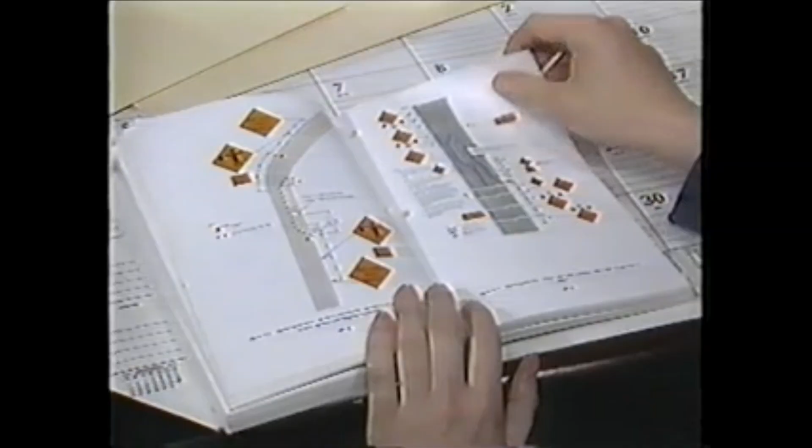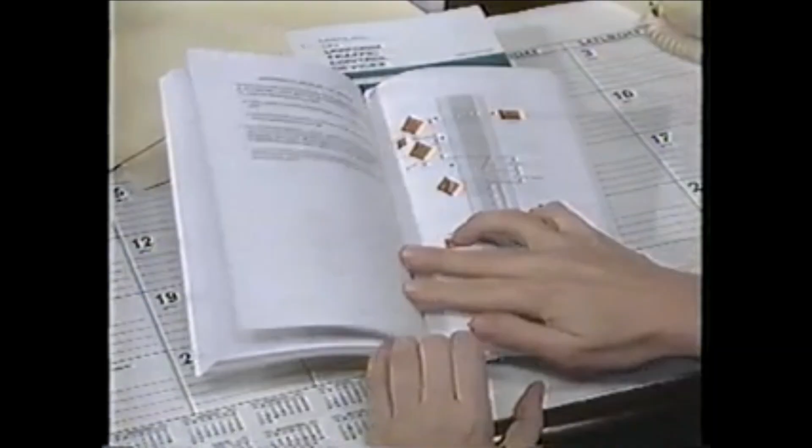Part 6 of the Manual on Uniform Traffic Control Devices covers traffic controls for street and highway construction, maintenance, utility, and incident management operations. It includes illustrations and layouts for several specific work zone applications. Your state or local agency may have also prepared a supplemental manual which shows additional specific applications and layouts.

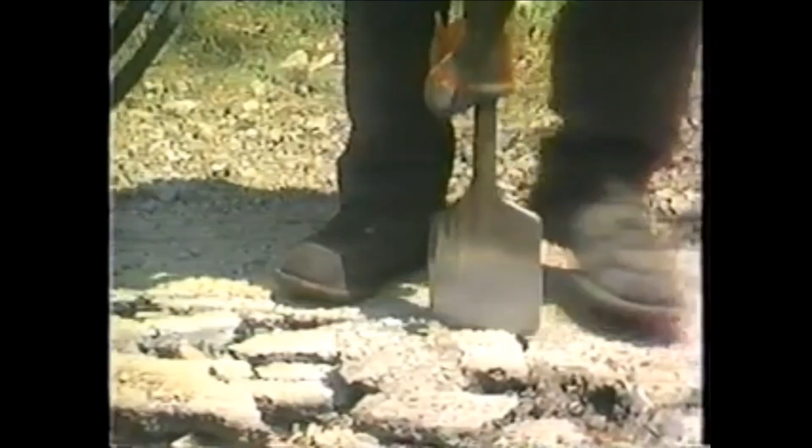Many of the typical work sites you'll encounter are illustrated in the Manual on Uniform Traffic Control Devices. However, the manual does not cover every conceivable situation. Good engineering judgment must be used to determine the best traffic control for a particular work site. This will depend upon the type of work needed, the location and duration of work, the type of roadway, traffic volume and speed, and any potential hazards.

The principles which you should follow to improve the safety of motorists and workers in short-term work areas include the following. First, keep safety of motorists, pedestrians, and workers your top priority. Try to keep traffic conditions as normal as possible, and take the time to plan and install a traffic control scheme. Sometimes this may mean spending almost as much time in setting up traffic control as you spend in completing the work.

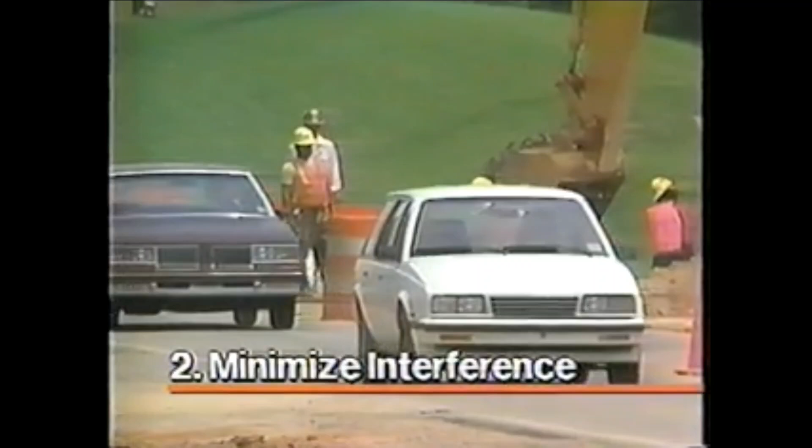Second, minimize interference with traffic movement. Try to maintain the safest maximum speed while eliminating abrupt lane closures. Also provide enough room for work equipment and vehicles inside of your work zone, and then open the roadway again as soon as possible.

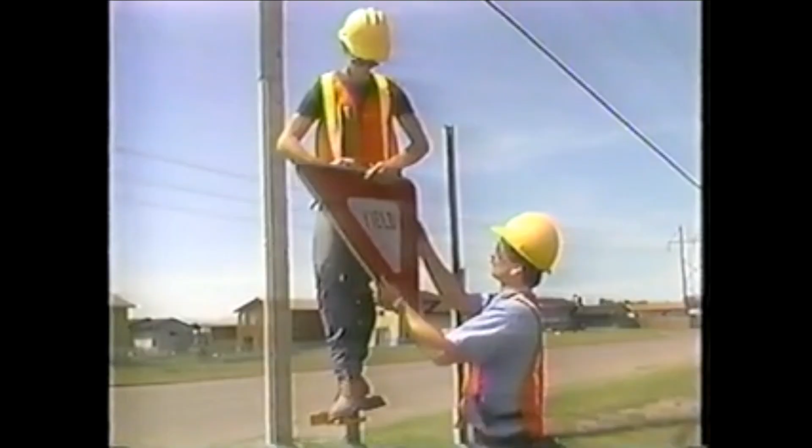Third, present a clear, easily understood message to drivers and pedestrians. Now, this means knowing the exact meaning of each traffic control device that is used. It also means that any conflict in meaning between temporary control devices and those permanently in place must be resolved. For example, you may need to close a lane for maintenance. All of the normal road conditions may guide the driver into the closed lane. Therefore, a special effort must be made to overrule the regular message during the duration of the work.

Fourth, have a plan in mind before going to the work site. The foreman generally takes on responsibility for designing, installing, and maintaining the traffic control plan. Now, this includes keeping the control devices in good repair and properly stored so that adequate visibility is maintained. As soon as the project is finished, you should promptly remove the traffic control devices.

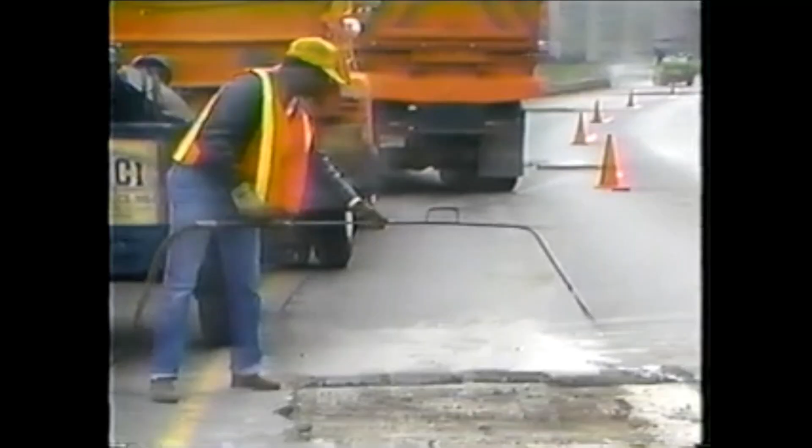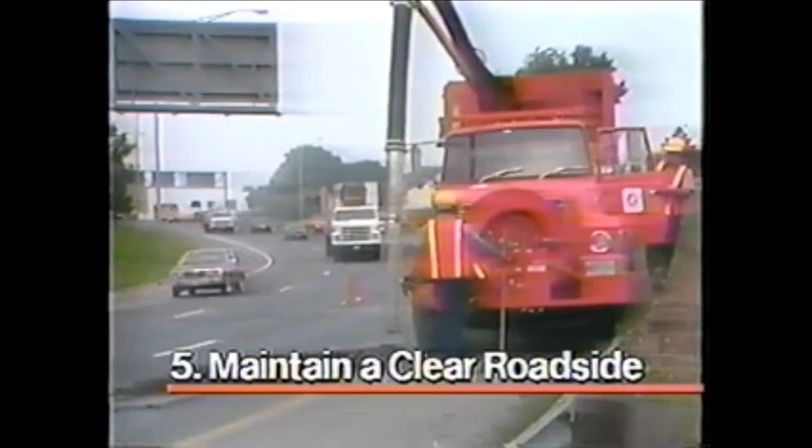Fifth and finally, anticipate the increased hazards caused by your presence on or near the roadway. Be sure to keep your equipment, materials, debris, and yourself out of the path of traffic. This means try to keep a clear roadside through the work area. Use traffic control devices that are lightweight and yielding to lessen vehicle damage.

The traffic control devices selected to assist motorists must satisfy a driver's need for information. You should carefully consider both the message and the placement of the traffic control devices. Inappropriate messages and incorrect placement of signs, markings, and other devices can mislead and confuse the motorist.

In work zones, there are 3 categories of messages which must be conveyed to the driver. These include the warning of potential hazards, information on safe speed, and the lane or shoulder over which a vehicle should be traveling. Drivers have particular problems when traffic control devices give inaccurate information, do not conform to standards, or are improperly installed.

Each person whose actions affect maintenance and construction zone safety should receive training. They must know the following principles. Keep the motorist's respect and the agency's credibility by presenting clean and well-maintained traffic control devices. If work is not in progress or a hazard is not there, take down, fold over, or cover the signs.

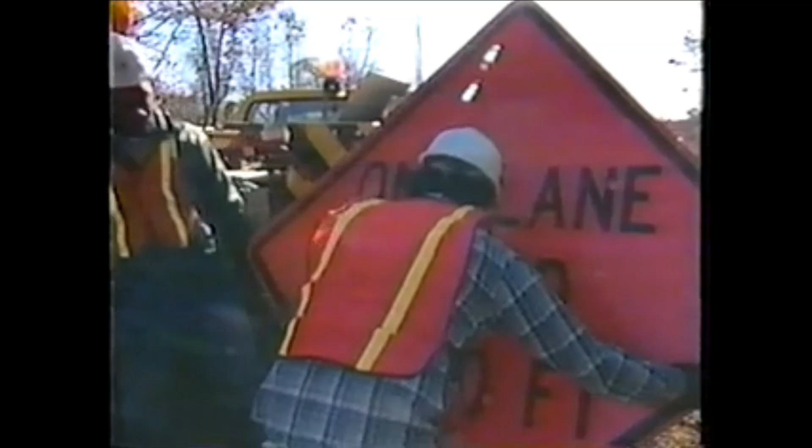Don't mislead the public. Remove channelizing devices when no longer needed. Don't tell drivers to expect a hazard that's not there. If you do, they may not believe other signs and devices used on the project. For example, don't use this sign unless flagging is actually taking place. Put yourself in the driver's seat and see how the traffic control looks to you. Maintain the controls as if every driver were approaching the area for the first time, especially in short-term work sites.

Discuss and think about good work area traffic control. Help your co-workers to perform their work with a minimum of exposure to traffic while watching for problems and reporting any damaged or missing devices.

Now, let's review what we've discussed in this introduction to work zone safety. Here are the main points to remember. 1. Part 6 of the Manual on Uniform Traffic Control Devices is the standard for traffic control in your work zones.

2. It may be supplemented by state and local manuals, and these should be consulted before setting up a work zone. 3. Plan your traffic control before going to the work site. Good planning includes carrying the proper signs, cones, and other devices needed to safely do the job. Be sure they're clean and in good repair.

4. Only display those devices that are needed by the driver. If the work zone traffic control device is not needed, remove, cover, or lay it down as soon as possible. Don't mislead the public. 5. Always ask yourself, how does it look to the unsuspecting driver approaching my work site? What's the driver's view?

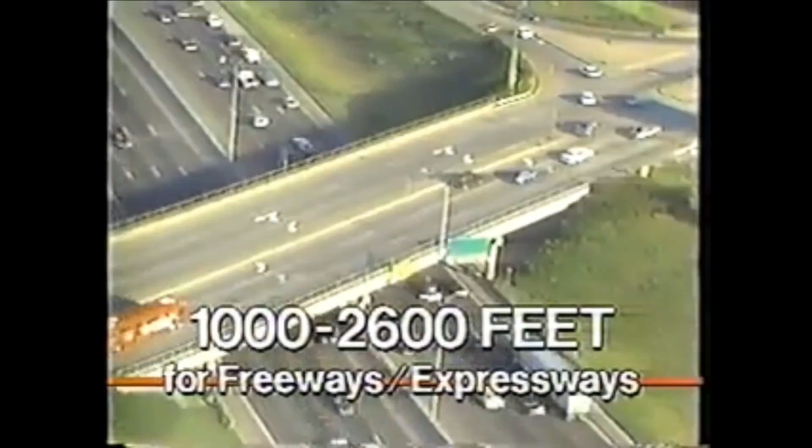In keeping with the Manual on Uniform Traffic Control Devices, a rule of thumb for the spacing between signs in a series is 200 feet for low-speed city streets, 350 feet for high-speed urban roads, 500 feet for rural roads, and 1,000 to 2,600 feet for freeways and expressways. Lightweight, yielding, or breakaway supports should be used for all sign installations.

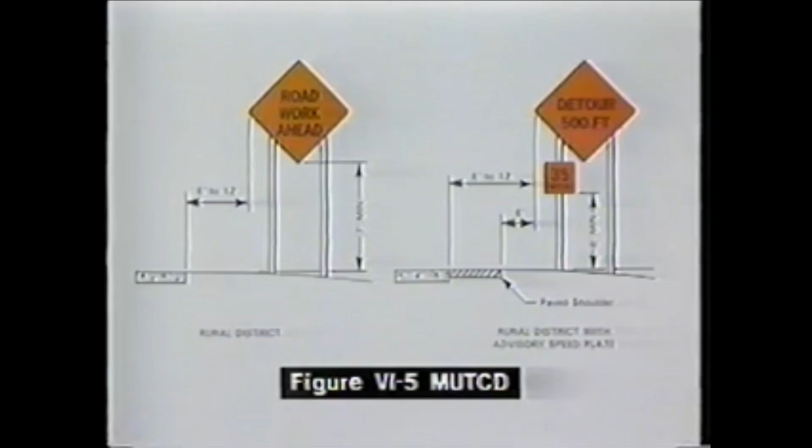Sign installations should be reviewed to avoid any possible glare from vehicle headlights. The minimum height requirements for signs attached to posts is shown. Signs on portable supports are required to be at least 1 foot above the roadway. All signs used at night are required by the Manual on Uniform Traffic Control Devices to be retroreflective or externally illuminated. Lighting from existing streetlights does not meet this requirement.

Pavement markings are very important in guiding traffic through work zones. Pavement markings, delineators, and channelizing devices outline the traffic path around a work area. Drivers use pavement markings as a primary means of guidance. The standard markings planned for the road should be in place before opening a new facility to traffic.

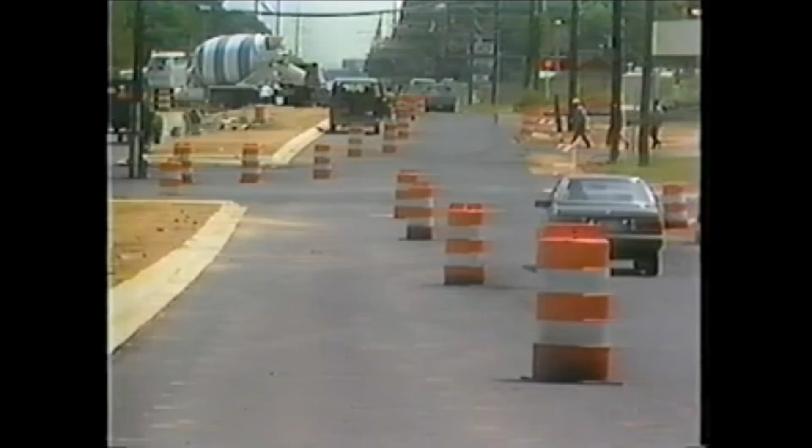Also, if revised lane patterns are planned for the work zone, interim markings should be placed before the traffic is changed. Where this is not feasible, such as during the process of making a traffic shift or carrying traffic through surfacing operations, temporary delineation may be accomplished with lines of traffic cones, other channelizing devices, or short strips of adhesive-backed retroreflectorized tape.

When pavement placed during the day is to be open to traffic at night, and permanent striping cannot be placed before the end of the workday, an interim stripe should be applied to indicate to the driver the location of the lane or center line.

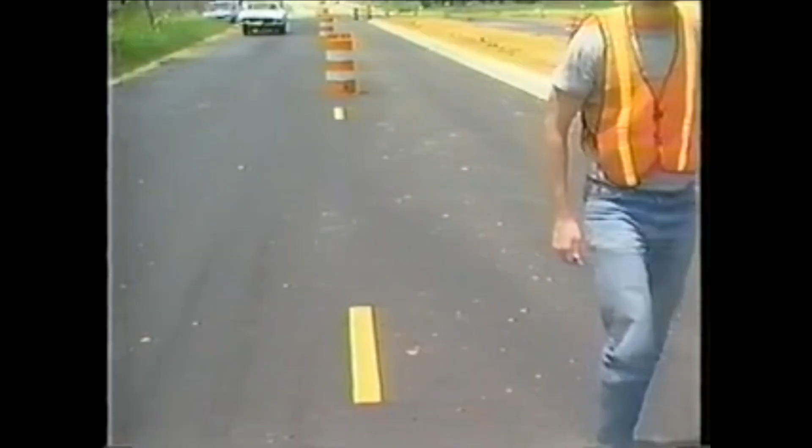Channelizing devices are used to warn and direct traffic away from or around a work area. They also control the flow of traffic when separating two directions of travel. They include barricades, barriers, vertical panels, cones, tubular markers, and drums. Each type has distinct visibility characteristics and advantages.

The Manual on Uniform Traffic Control Devices requires that channelizing devices used at night be retroreflectorized with a material having a smooth, sealed outer surface. This includes commercially available retroreflectorized sheeting and tape strips. It does not include the use of pavement marking tape.

Some devices are easily knocked down and require a weight, such as a sandbag. These weights must be placed at the bottom of the device for stability and to keep the weight from being thrown if hit. Neither the device nor the weight should cause excessive damage when struck. Sandbags should not be placed where they will be a hazard to the driver or limit the view of the device.

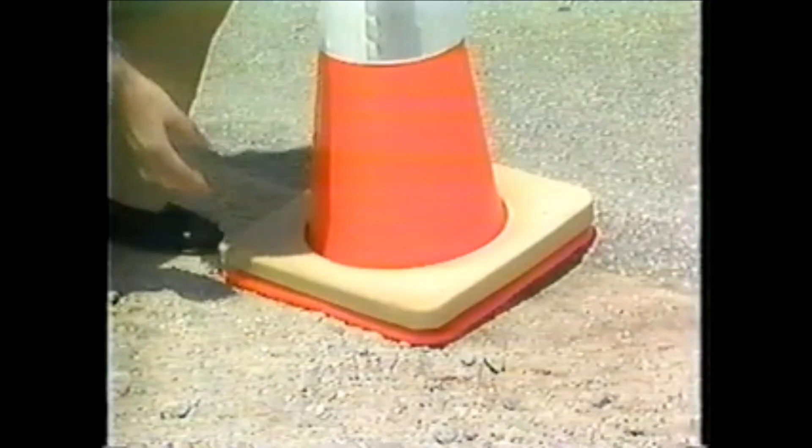Cones are lightweight channelizing devices that may be stacked for storage. They are easy to place and remove and are a minor impedance to traffic flow. For stability, a rubber or sand collar or a specially weighted base may be added. When purchasing cones, specifications may require 60% or more of the weight in the base, thus removing the need for extra base weights or collars. Cones cause little or no damage when hit.

They must be at least 18 inches high, but 28-inch cones must be used on freeways and other roadways where speeds are 45 miles an hour or greater. At night, 28-inch cones or larger must be used. 28-inch cones must have a 4-inch wide band, 2 inches below a 6-inch band. Any cone height less than 28 inches is not acceptable for nighttime use.

Using cones can have disadvantages because drivers have less respect for them, and cones can be easily displaced or knocked over unless properly ballasted. When cones are used, they should be checked periodically, and those that have either been displaced or knocked over should be reset.

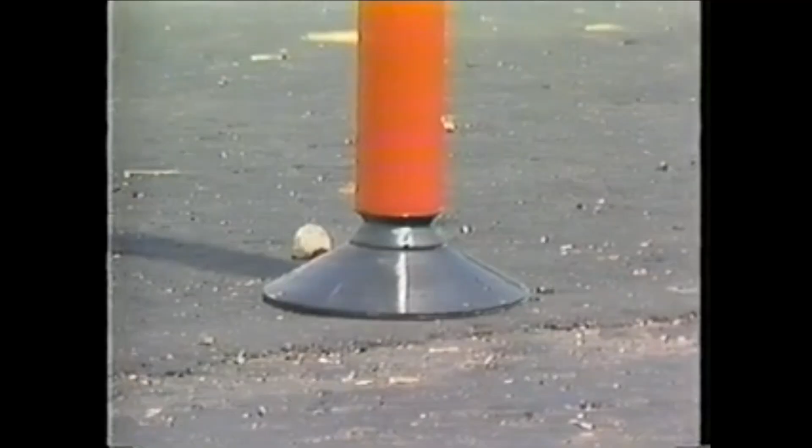Tubular markers are similar to cones in that they are lightweight, easy to install, and are a minor impedance to traffic flow. Tubular markers may be set in special weighted bases or fastened directly to the pavement. Because of their narrow size, they offer a particular advantage when forming new lanes or separating two-way traffic for a short-term activity.

Tubular markers are at least 18 inches high, with taller devices preferred for better visibility. If used at night, the Manual on Uniform Traffic Control Devices requires that they be retroreflectorized. Tubular markers have the same disadvantages as cones, plus having less visible area.

Vertical panels are used as either channelizing or warning devices, but are not as portable or easy to install as cones or tubular markers. They are useful in narrow areas where barricades and drums would be too wide. Vertical panels should be mounted on lightweight posts, driven into the ground, or placed on lightweight portable supports. They may be mounted back to back and used between opposing lanes of traffic.

Drums are used as either channelizing or warning devices. They are highly visible, give the appearance of being formidable objects, and therefore command the respect of drivers. Plastic, not metal drums, shall be used. The Manual on Uniform Traffic Control Devices requires that markings on a drum be horizontal orange and white stripes that are retroreflectorized 4 to 6 inches wide.

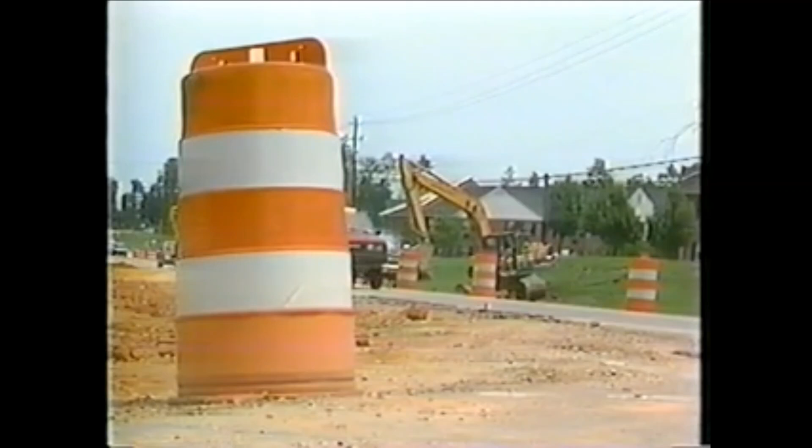The drum must have at least 2 sets of orange and white stripes, but can have non-retroreflectorized spaces up to 2 inches wide between the stripes. Drums must have a minimum width of 18 inches, regardless of orientation, and their tops shall be closed. Plastic drums can be nested, allowing for easy transport and storage. Many of the commercially available plastic drums have 1 or more flat sides to prevent rolling and have flanges or recesses for warning lights.

Barricades should be constructed of lightweight materials and are classified as types 1, 2, and 3. The type is determined by the number of retroreflectorized rails facing traffic. Types 1 and 2 are portable and can be used for either channelizing or marking hazards. Type 3 barricades are used for road closures. Types 1 and 2 often have rails on both sides and may be used to separate opposing lanes of traffic. The rails have alternating orange and white retroreflectorized stripes that slope down toward the side traffic is to pass.

For road closures, a Road Closed sign and a detour arrow sign, if needed, may be mounted on a Type 3 barricade. If local traffic will be allowed to use the closed roadway, then the Local Traffic Only sign should be mounted on the barricade. The terms barrier and barricade are frequently confused. A barricade indicates the location of a hazard or a desired path a motorist should take. On the other hand, a barrier provides a positive physical separation between traffic and the work area or between opposing streams of traffic.

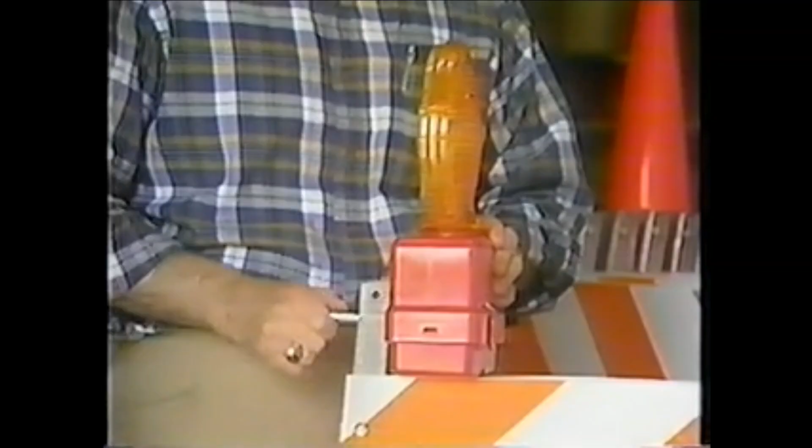Steady burn lights, Type C, are used on a series of channelizing devices or on barriers which either form the taper to close a lane or shoulder or to keep a section of lane or shoulder closed, and are also used on the channelizing devices beside the work area at night. Both Type A and Type C lights have photoelectric switches to activate them at night. Warning lights should be secured in such a way that they'll not separate from the channelizing device or sign when hit by a vehicle. Warning lights that come loose during an accident may become dangerous flying objects.

Work vehicles in or near the traffic areas are hazards and should be equipped with flashing lights. The vehicle warning may be emergency flashers, flashing, strobe, or rotating beacons. High-intensity lights are effective both day and night. The flashing lights should meet the requirements of the agency that has jurisdiction over the street or highway. These lights should be used in addition to other channelizing and warning devices. However, in some emergency situations where the work may be in progress for a very short time, these lights may be the only warning device.

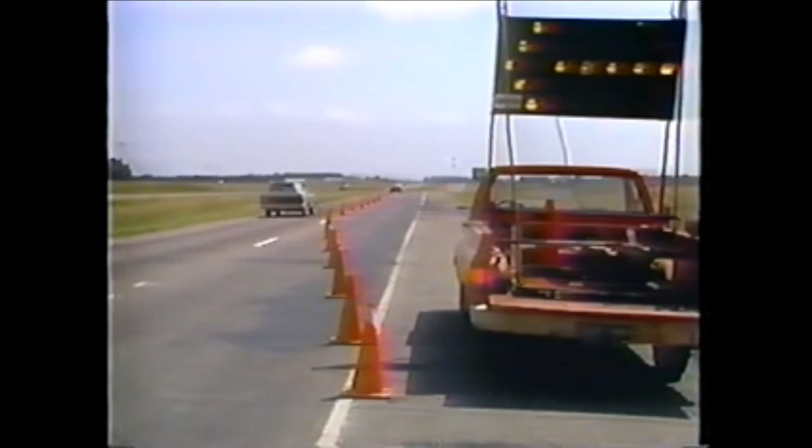Arrow displays are signs with a matrix of lights capable of either flashing or sequential displays. They are used for moving traffic out of a lane and may be used at tapered lane closures and with mobile operations. They are not a substitute for a lane closure taper. There are two types of arrow displays: flashing and sequencing.

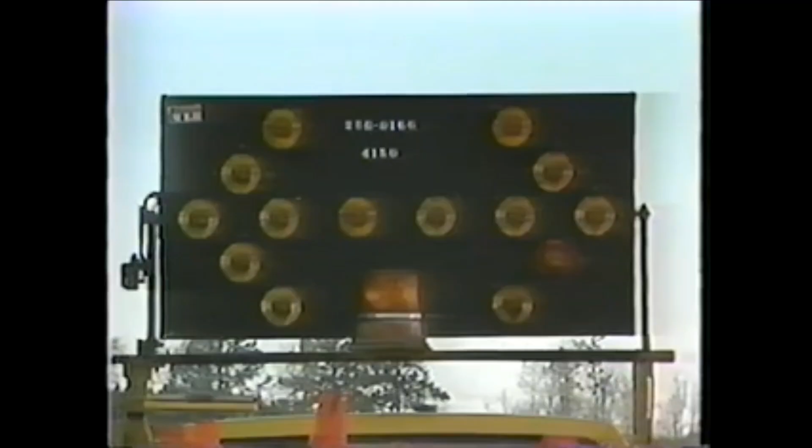Arrow displays have four basic operating modes: left arrow, right arrow, left and right arrow, and caution mode, four lamps arranged in the four corners of the panel. Flashing arrows must never be used on two-lane roadways because traffic may be directed into a head-on collision. Arrow displays on two-lane roads can only be used in the caution mode.

Flashing hazard identification beacons are used in work areas both day and night to alert drivers of a critical point in the highway, such as a truck crossing, and have the same meaning as permanently mounted beacons. Flashing beacons are not used for channelizations.

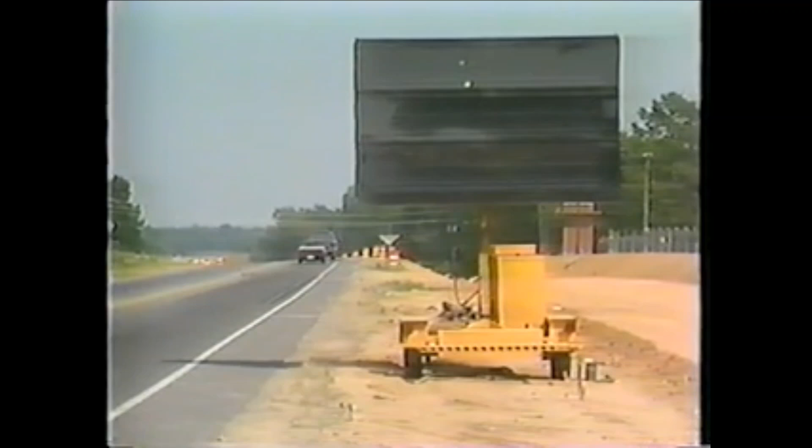Portable changeable message signs capable of displaying various messages to the motorist will sometimes help construction zone signing. These devices are normally trailer or truck mounted and have their own power system. Because they're expensive to buy and operate, changeable message signs are normally used for the more complex traffic control plans.

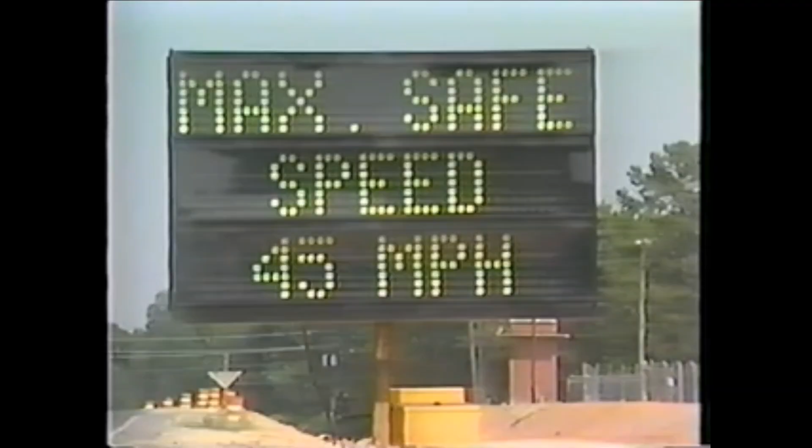When using a changeable message sign, be sure the message is clear. A lengthy message may distract the motorist too long. The word order in a message can also cause problems. For example, "right lane closed, merge" would get a different driver response than "lane closed, merge right." Yet the messages are similar, except for the beginning point.

This concludes our brief review of traffic control devices. Particular details will be found in the Manual on Uniform Traffic Control Devices. Now, in the following section, we'll be discussing the concepts and elements of traffic control zones.

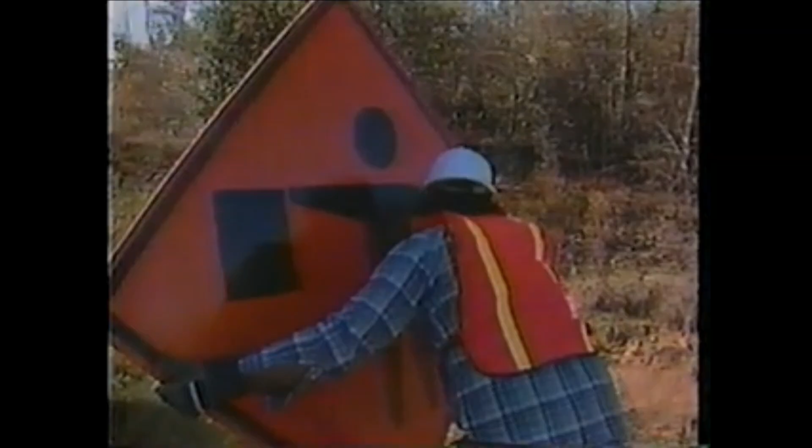When traffic is affected by construction, maintenance, or utility operations, traffic control is needed to safely guide and protect motorists, pedestrians, and workers in and through work zones. This zone is the area between the first advance warning sign and the point beyond the work where traffic is no longer affected. Most temporary traffic control zones can be divided into four areas.

In this part of the training, we'll look at each of the areas and examine them for one direction of travel. If the work you'll be doing affects more than one direction of travel, the same principles we cover here will apply to traffic in all directions. These are the four areas of temporary traffic control zones we'll be discussing. Accidents can occur in all of these areas if they are not properly controlled.

Advance warning area, transition area, activity area, and termination area. The advance warning area prepares drivers and alerts them to what's coming. An advance warning area is necessary for all traffic control zones because drivers need to know what to expect. Before reaching the work area, drivers should have enough time to adjust their driving patterns.

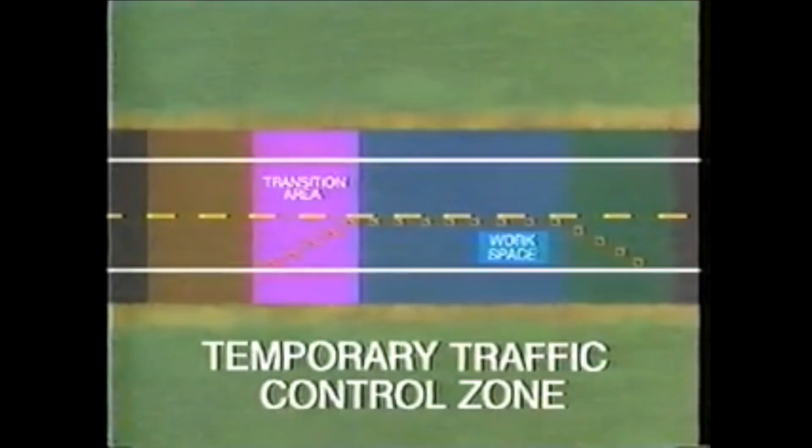Next is the transition area. When work is performed within 1 or more traveled lanes, a lane closure is generally required. In the transition area, traffic is channeled from the normal highway lanes to a new path, which is required to move traffic around the activity area. Most often, this is accomplished with tapers to close the lanes. The transition area should be obvious to drivers. The correct path should be clearly marked with channelizing devices so that drivers will not make a mistake and follow the old path. If the existing pavement markings create confusion, interim markings should be used.

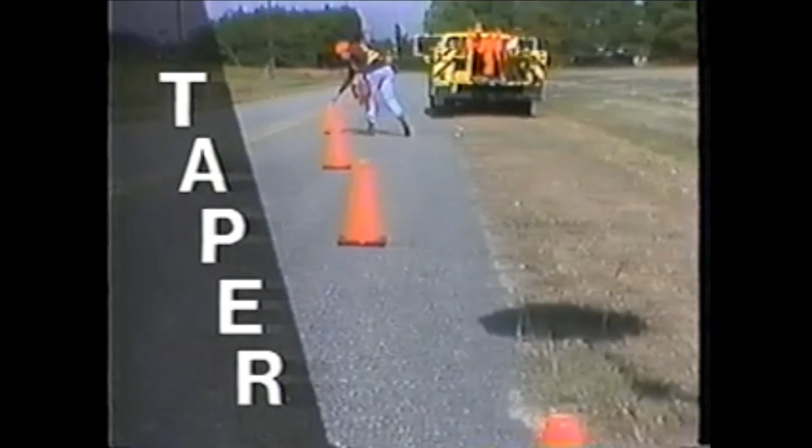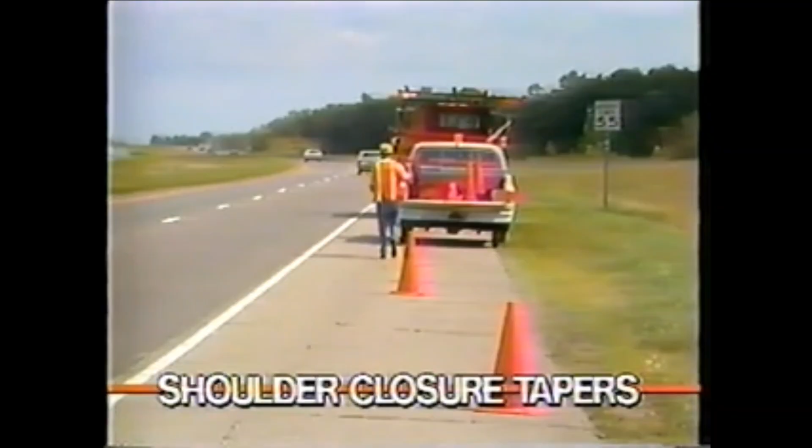A taper is a series of channelizing devices placed at an angle to move traffic out of its normal path. There are 5 general types of tapers used in traffic control zones. Merging tapers close a lane of moving traffic on multi-lane highways where a merge is required. The spacing for channelizing devices should not be greater than the speed limit. Lane shift tapers move traffic to a different lane where a merge is not required. Shoulder closure tapers are needed to close shoulder areas.

Two-way tapers control two-way traffic where drivers are required to alternately use a single lane. These tapers are used when flaggers are present. Downstream tapers are those installed to allow traffic back into the normal path. The length of each type of taper is very important and is determined by several factors. Let's look at each of these factors in more detail.

The length of a merging taper, which is used to close a lane, is determined by the speed of traffic and the width of the lane to be closed. The 2 formulas for determining the length of tapers for lane closures are discussed in the Manual on Uniform Traffic Control Devices. For speeds of 45 miles per hour or greater, the merging taper length should be at least the width of the lane multiplied by the posted speed or the observed operating speed.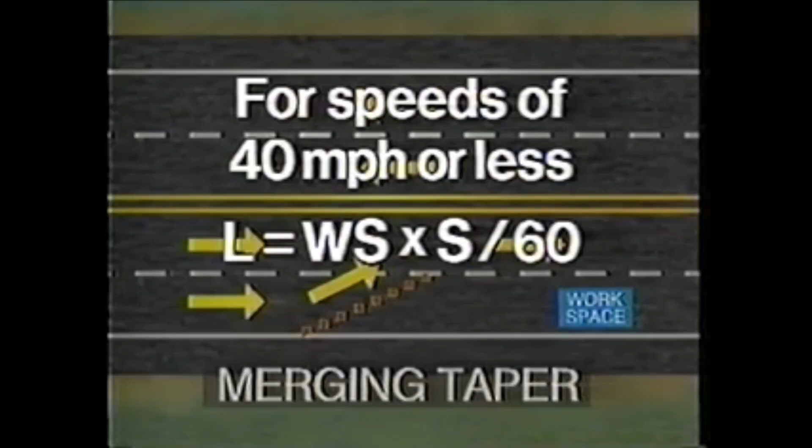For speeds of 40 miles per hour or less, the length of the taper should be at least the product of the width of the lane times the posted speed squared divided by 60. This is actually the high-speed taper multiplied by the factor of the posted speed divided by 60. In most tables, the equation is shown like this.

Most state and local manuals include tables showing the required taper lengths for various speeds and lane widths. For example, a 40 mile per hour posted speed and an 11-foot lane requires a 295-foot merging taper.

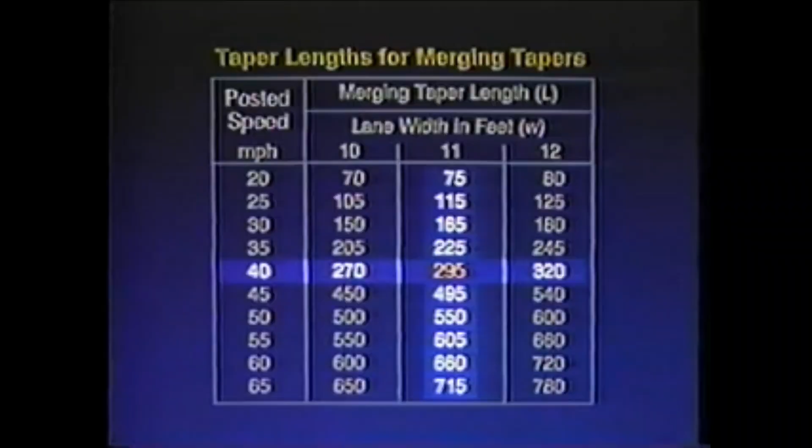The lane shift taper is used when traffic is only being shifted and no merge is required. Therefore, the taper does not have to be as long as a merging taper. The minimum taper length is 1/2 L, where L is the computed length of a merging taper for the given posted speed and width of the lane shift.

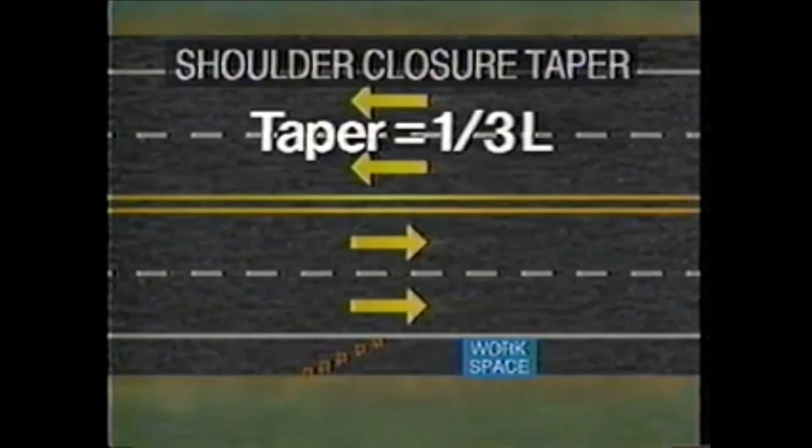When an improved shoulder having a width of 8 feet or more is closed on a high-speed roadway, it should be treated as a closed part of the roadway. This is because drivers expect to be able to use the shoulder in the event of an emergency. The shoulder taper should be 1/3 L, where L is the shoulder width multiplied by the posted speed. If the shoulder is used as a travel lane, however, the taper is equal to L.

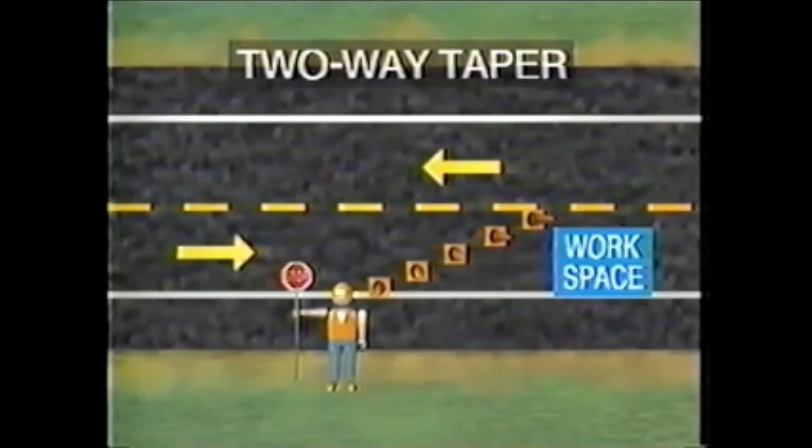The two-way traffic taper is used in advance of a work area that occupies part of a two-way road when the remainder of the road is used alternately by traffic in either direction. A short taper is used to slow down traffic by giving the appearance of restricted alignment. One or more flaggers or temporary traffic signals are used to assign the right-of-way in such conditions. Two-way traffic tapers should be a maximum of 100 feet long, with channelizing devices spaced at a maximum of 20 feet to provide clear delineation of the taper.

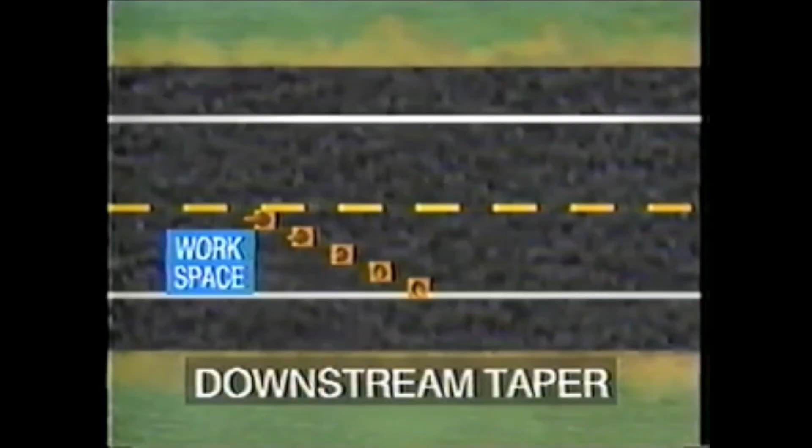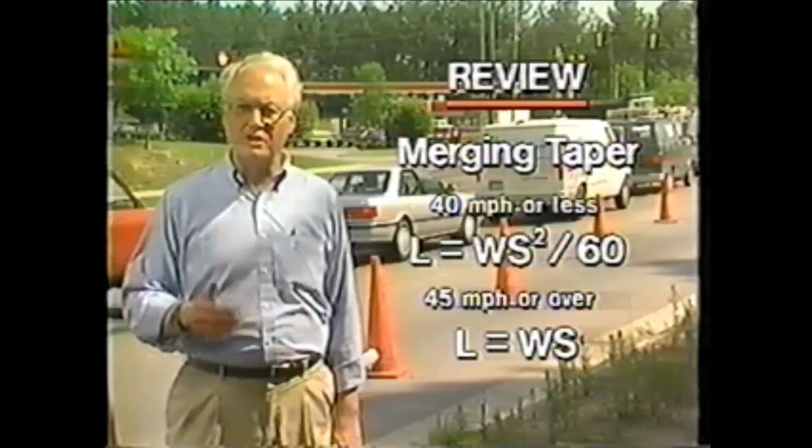Let's briefly review tapers and taper lengths. Where traffic on a multi-lane highway must merge, the required length is a function of the speed limit and the lane width. If traffic on a multi-lane road is to be shifted to a different lane, the taper is 1/2 the length of the merging taper. When working on an improved shoulder, the required taper length is 1/3 of the merging taper length.

Now, when traffic is on a two-way road and it's reduced to one lane, a taper with a maximum length of 100 feet is needed. And to let the driver know that he may return to the closed portion of the roadway, a 100-foot taper may be used. If restricted sight distance is a problem, for example, a sharp vertical or horizontal curve, the taper should be moved well in advance of the obstructed view. Beginnings of tapers should never be hidden behind curves.

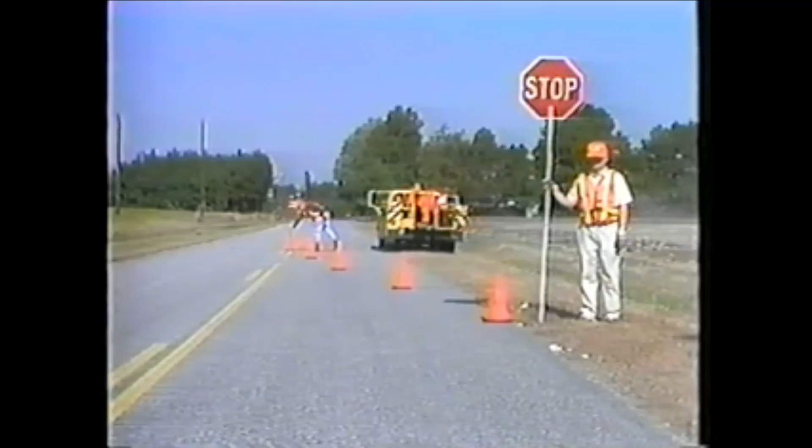Traffic should be observed to see if the taper is working correctly. Frequent use of brakes and evidence of skid markings are indications that either the taper is too short or the advance warning is inadequate. The activity area consists of 4 distinct spaces. They are the longitudinal and lateral buffer spaces, the workspace, and the traffic space.

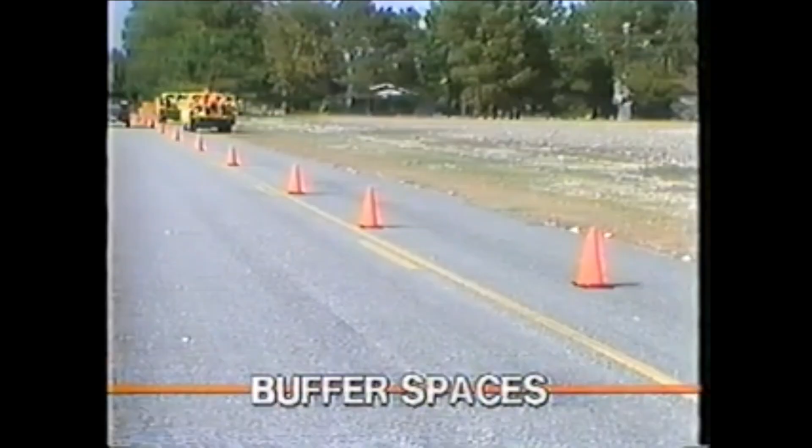Buffer spaces are open and unoccupied spaces and provide a margin of safety for traffic and workers. Although they are optional, they should be provided whenever field conditions permit their use. The longitudinal buffer space is between the transition area and the workspace and provides room for the driver to stop his vehicle if he fails to negotiate the transition taper and before he enters the actual workspace. It is important for the buffer space to be free of equipment, workers, materials, and vehicles.

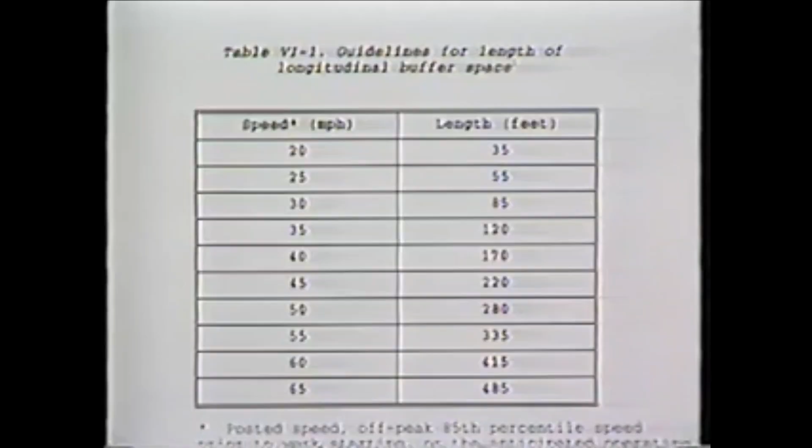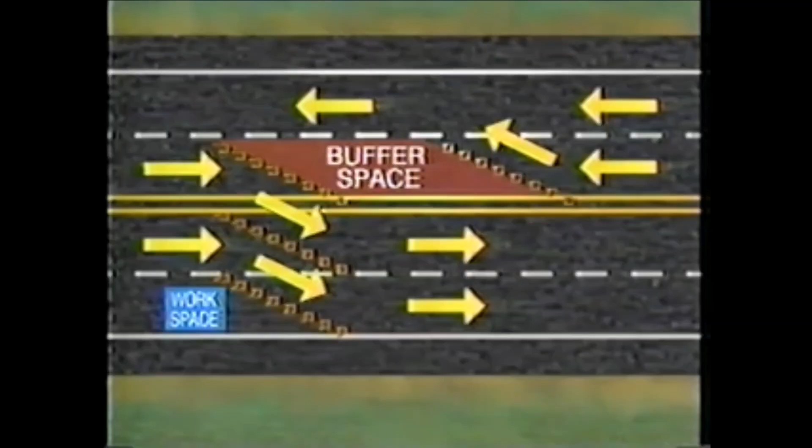The length of the longitudinal buffer space is based on the stopping distance for the speed being considered. Table 6-1 of the Manual on Uniform Traffic Control Devices provides guidelines for the length of buffer spaces for various speeds. It is measured from the end of the transition area to the beginning of the workspace. Situations occur where one lane of traffic uses a lane that normally flows in the opposite direction. In these situations, a longitudinal buffer space should be used to separate the 2 tapers for the opposing directions of traffic to help prevent head-on collisions.

Lateral buffer spaces separate moving traffic from the workspace as well as opposing streams of traffic. The width of this space is determined by engineering judgment and is often governed by the portion of the roadway which is needed to perform the actual work.

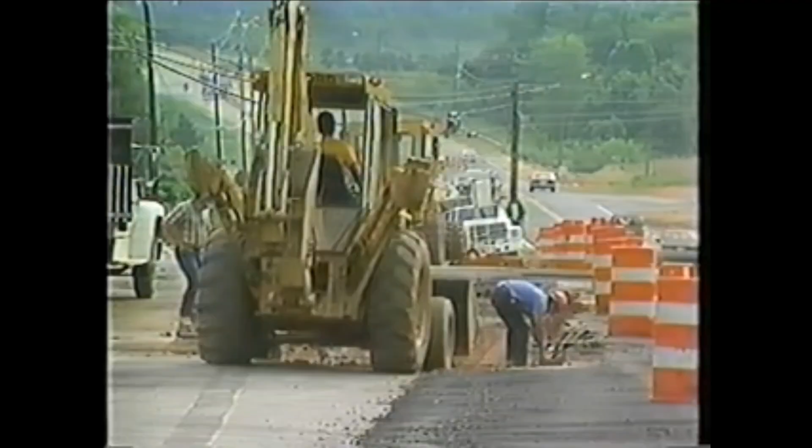The workspace is that portion of the roadway which contains the work activity. It is closed to traffic and set aside for exclusive use by workers, equipment, and the storage of construction materials. Workspaces may remain in fixed locations or may move as work progresses. For long-term operations, the workspace may be shielded by barriers to exclude traffic and pedestrians.

The traffic space is the portion of the roadway in which traffic is routed through the activity area. Channelizing devices are used to separate the traffic space from the work activity at a spacing no greater than twice the posted speed limit. Every feasible effort should be made to minimize traffic conflicts with the work area.

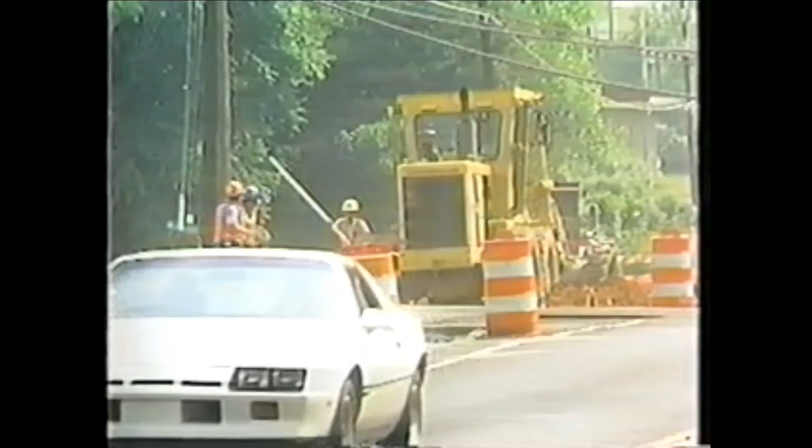These are suggestions. Use traffic control devices to make the travel path clearly visible to drivers. For nighttime operations, the traffic control devices must be retroreflectorized and have a large surface area. Place channelizing devices between the work area and the traveled way. Provide safe entrances and exits for work vehicles.

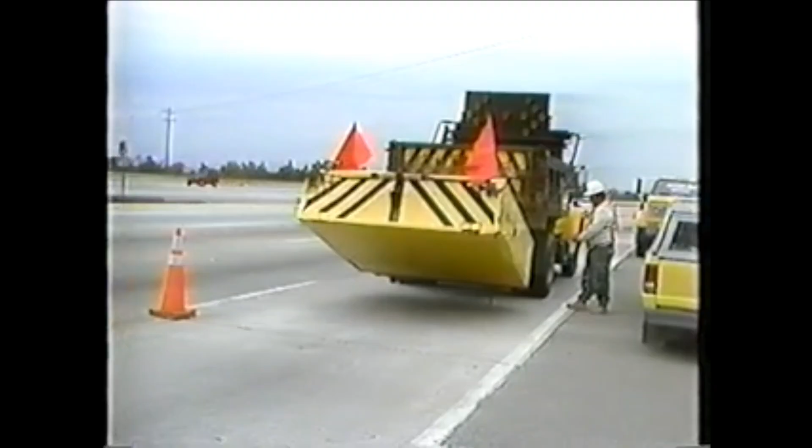Flags and flashing lights should be considered on work vehicles exposed to traffic, and a truck-mounted attenuator be provided whenever possible to protect work crews. The termination area provides a short distance for traffic to clear the activity area and return to the normal traffic lanes. It extends from the downstream end of the activity area to the End Road Work sign. A downstream taper may be placed in the termination area.

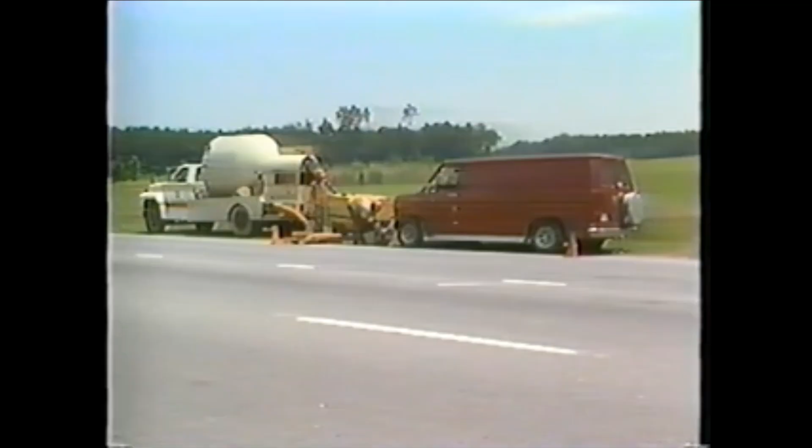For some work operations, such as a single location utility or maintenance repair, it may not be necessary to display an End Road Work sign because it will be obvious to drivers that they have passed the activity area. Avoid gaps in the traffic control at work zones that may falsely indicate to drivers that they have passed the activity area. For example, if the work includes intermittent activity throughout a 1-mile section, drivers should be reminded periodically that they are still in the work zone.

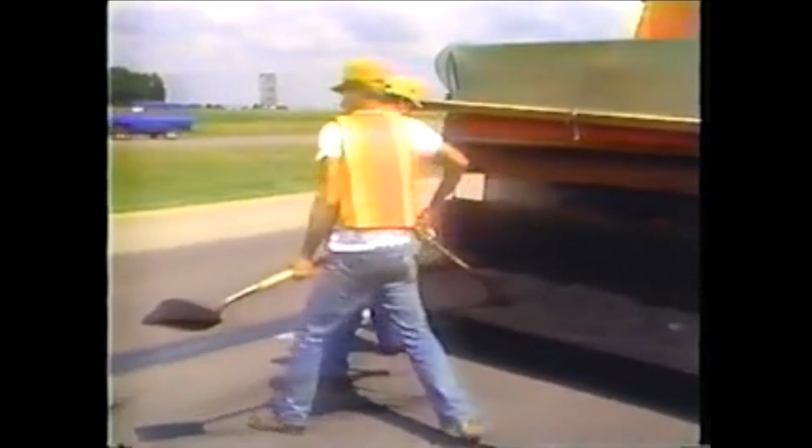The primary purpose of the guide sign, Road Work, next miles, is to inform the driver of the length of the work zone. It should not be erected until work begins. In mobile operations, the advance warning area may be provided by signs and flashing lights on the work vehicle. Additional advance warning signs may be warranted depending on the volume and speed of the traffic. A shadow vehicle equipped with an arrow display and flashing lights may also be used.

With mobile operations, the transition area actually moves with the activity area, and the buffer space is the area between the shadow vehicle, if one is used, and the work crew. The termination area is usually obvious to the driver passing the work vehicle. The use of a truck-mounted attenuator should be considered for mobile operations.

As a review, these are the 4 parts of a traffic control zone. The advance warning area alerts the driver that there's something ahead that demands his close attention. In the transition area, traffic is shifted or moved to eliminate interference with work activities. The length of the taper should be computed or obtained from a table.

The activity area is set aside for the actual work to be performed, to provide for the movement of through traffic, and to offer a margin of safety for both workers and motorists. And the termination area tells the motorists that they are out of the construction area and may resume normal driving. This concludes the review of the 4 basic parts of a temporary traffic control zone and their function. In the next session of the series, we'll be reviewing some typical applications that you'll be using in your work.

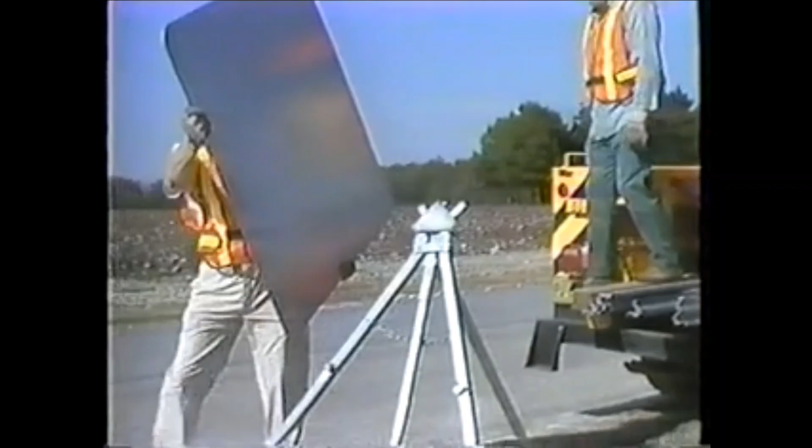You are probably most vulnerable during the installation of the traffic control devices. To minimize this hazard, install the devices before work begins, starting with the first device the driver will see when approaching the area. Then continue installing devices, advancing toward the work area.

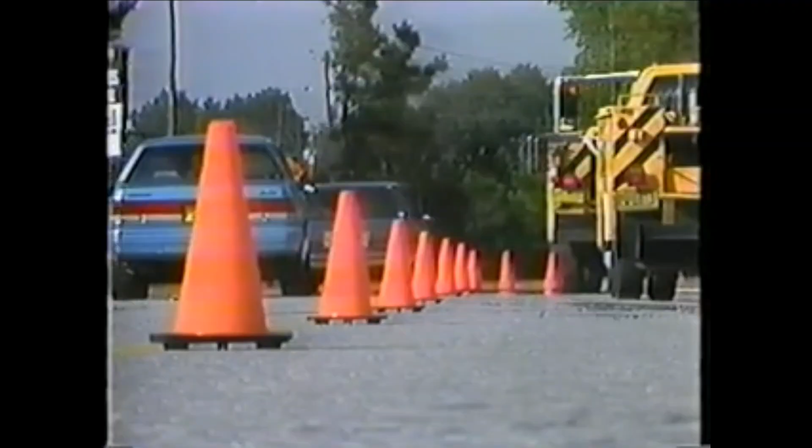To evaluate any work zone traffic control, drive through the work zone after all the devices are in place. Difficult as it is, put yourself in the place of the unfamiliar driver, the one who's not anticipating that you're in the roadway. If the traffic control scheme gives the driver the necessary warning and guidance, you and your co-workers will be providing the best protection for yourselves while working on or near the roadway.

As soon as the work is completed, remove the traffic control devices in the reverse order of installation, starting with the termination area and proceeding back to the first device installed. A good technique for removing the control devices is to first place them on the shoulder of the roadway and then pick them up in the direction of traffic flow. The best way to illustrate these principles is to show the installation of the control scheme for some common types of operations.

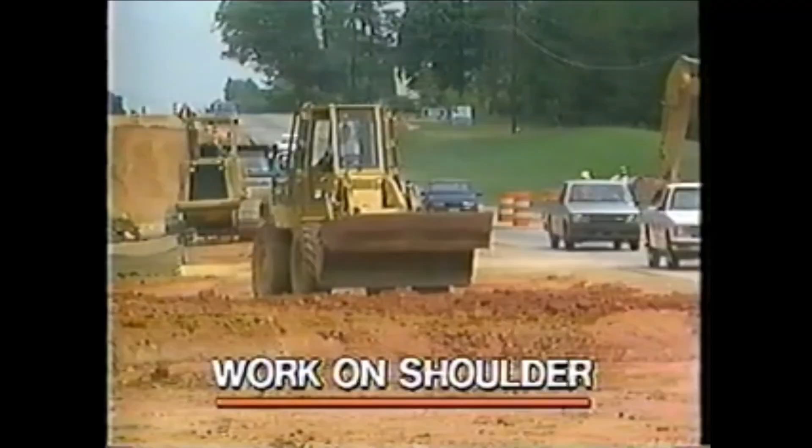In the first example, the work is entirely beyond the shoulder or parking lane. Traffic control will generally consist of flashing vehicle lights and flags. An advance warning sign should be used when the work will interfere with traffic in any way. Now, let's look at work on the shoulder or parking lane. If there is no direct interference with traffic, the motorist should be warned with the sign "Shoulder Work," as shown.

If a shoulder closure is involved, a transition area should be used. The length of the taper should be 1/3 of the lane closure taper length. In this case, the shoulder width is used for the formula instead of lane width. Remember that the lane closure taper length is the product of the lane width and posted speed limit for speeds over 45 miles per hour. Let's assume a 55 mile per hour posted speed and a 10-foot shoulder. The lane closure taper would be 10 times 55 or 550 feet. The shoulder closure taper is therefore 1/3 of this, or approximately 180 feet.

A buffer space should be provided in advance of the workspace. When work is on the shoulder or takes up part of a lane, traffic volumes, types of traffic (this could be buses, trucks, and cars), speed and capacity should be analyzed to determine whether the affected lane should be closed. Now, the lane should not be reduced to less than 10 feet. You can consult Part 6 of the Manual on Uniform Traffic Control Devices.

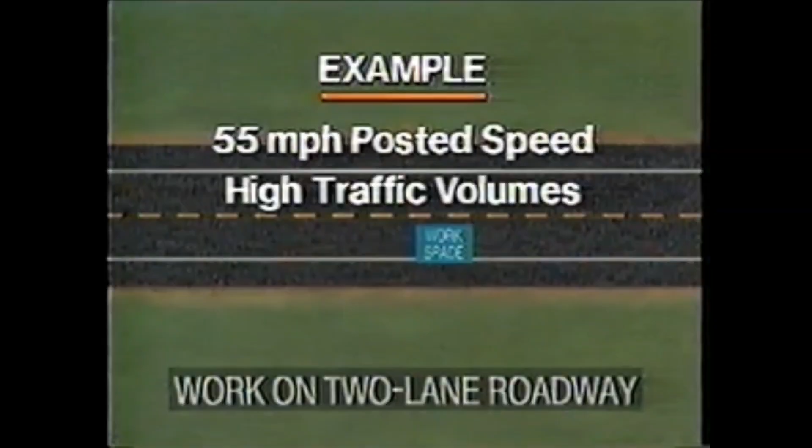When it is necessary to close one lane of a two-lane, two-way road, the remaining lane must be used by traffic traveling in both directions. For this example, the speed limit is 55 miles per hour, and the highway is a major arterial route with relatively high traffic volumes. This makes it necessary to use 2 flaggers and to install the 3 advance warning signs 500 feet apart.

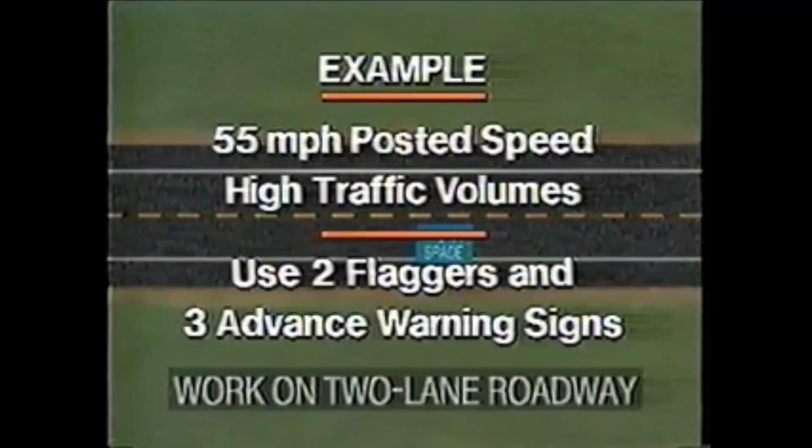First, install the Road Work Ahead sign for the unobstructed roadway. This sign is placed at least 2,000 feet in advance of the workspace. The second sign, One Lane Road Ahead, is placed 500 feet from the first sign. The last sign installed, the flagger symbol, is placed 500 feet from the second sign. The first flagger then assumes his or her station 500 feet from the flagger sign, placing the first flagger at least 500 feet from the beginning of the workspace.

The same series of signs are then installed on the side of the roadway on which the work is being done, again starting with a Road Work Ahead sign 2,000 feet from the workspace, a One Lane Road sign at 500 feet, a flagger symbol at another 500 feet, and finally the flagger 500 feet beyond the last sign. At this time, the 2 flaggers begin controlling traffic through the one-lane section.

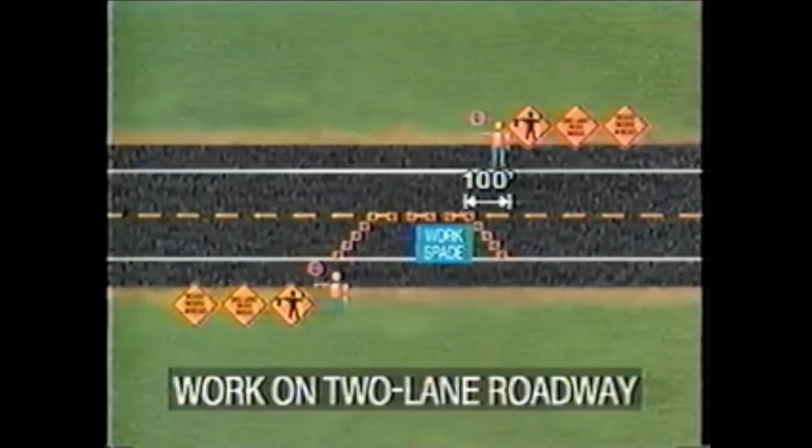Next, install a 100-foot taper made up of 5 or more channelizing devices. A 400-foot buffer space and the workspace are then outlined with channelizing devices, spaced at approximately 100-foot intervals. The work vehicle may then be moved into the closed lane at the end of the buffer space. The 100-foot downstream taper is then installed at the end of the workspace. Finally, the End Roadwork sign is placed 500 feet from the workspace and completes the work zone.

As previously emphasized, the best way to evaluate traffic control is to drive through the work zone after all the devices are in place. Now the work activity may begin. After the project is completed and all workers, materials, and equipment are off the roadway, the traffic control devices are removed in reverse order of installation. Remember, a good technique for removing the devices is to first place them on the shoulder of the roadway, then pick them up in the direction of traffic flow.

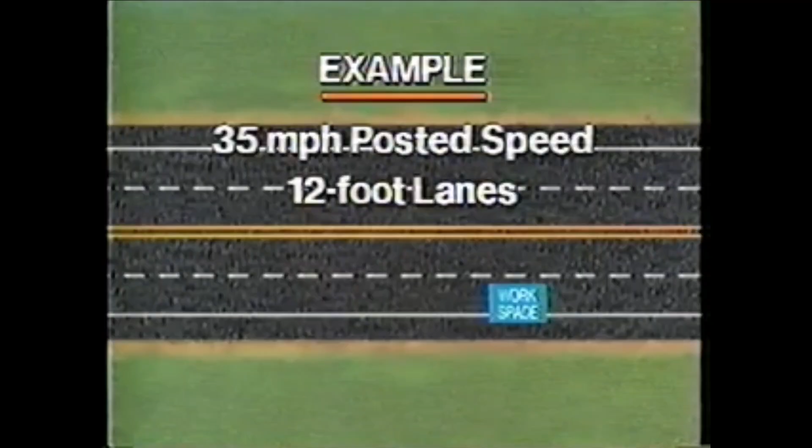The next example is an urban undivided 4-lane roadway. The work being done makes it necessary to close the right lane of the roadway. If the left lane were to be closed, the layout would be reversed. If the posted speed is 35 miles per hour with 12-foot lanes, then the required lane closure taper would be 12 times 35 times 35 divided by 60, which equals 245 feet.

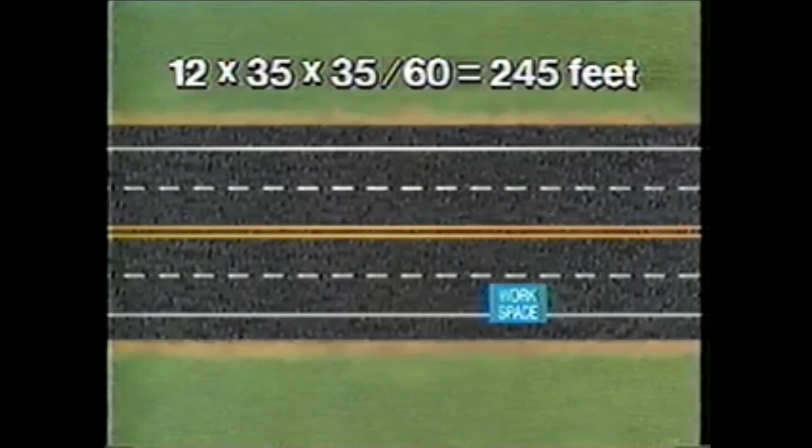We'll round it to 250 feet. The first sign installed for the unobstructed roadway is a Roadwork Ahead sign. This sign is placed 200 feet in advance of the workspace. The signs for the roadway on which work is taking place are then installed.

The Roadwork Ahead sign is placed 970 feet before the workspace. The next sign is a Right Lane Closed sign, 200 feet from the Roadwork Ahead sign. Then we place a Lane Reduction Transition sign 200 feet from the Right Lane Closed sign.

Now that all of the advance warning signs are in place, it is recommended that you install an advance warning flashing arrow display. This is done to give you, the worker, added protection while setting up the taper. If there is a shoulder, the arrow should be placed on the shoulder at the beginning of the taper. If there is no shoulder, it should be placed as illustrated.

For this application, the lane closure taper will consist of 8 channelizing devices on 35-foot centers for a 250-foot taper. It is a good practice to spot the cones or other devices at the proper spacing on the shoulder and then walk them out into the lane.

A 120-foot buffer space and the workspace are then outlined with channelizing devices spaced at 2 times the posted speed, or at 70-foot intervals. The next element installed is a 100-foot downstream taper. The last element installed is the End Roadwork sign, 500 feet from the workspace. Finally, the work vehicle may be moved into the workspace.

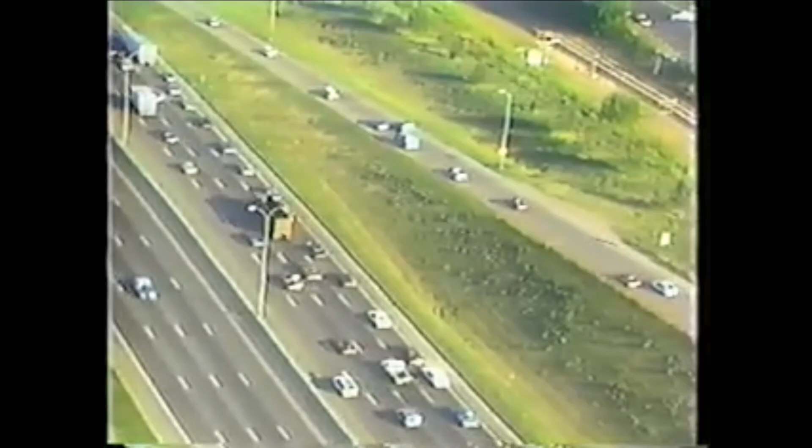The next example will be on a high-speed divided multi-lane highway, where the work being done requires the right lane to be closed. The first element installed is the advance warning area, approximately 1 1/4 miles in advance of the workspace. In the previous examples, the advance signs were installed only to the right of the approaching traffic. However, for one-way multi-lane roadways, the advance signs are generally installed on both the left and right sides of the roadway.

The first 2 signs installed are the 2 Roadwork Ahead signs, 1 1/4 miles before the workspace on both sides of the roadway. Next, 2 Right Lane Closed signs are placed 1/2 mile from the first signs, again 1 on each side of the roadway. Third, a pair of Lane Reduction Transition signs. These signs are placed 1,600 feet from the Right Lane Closed sign.

Next, 1,000 feet from the lane transition sign, install the second element of traffic control, the lane closure taper. When setting up the taper, it is good practice to place your work vehicle or advance warning arrow display before the start of the taper for added protection.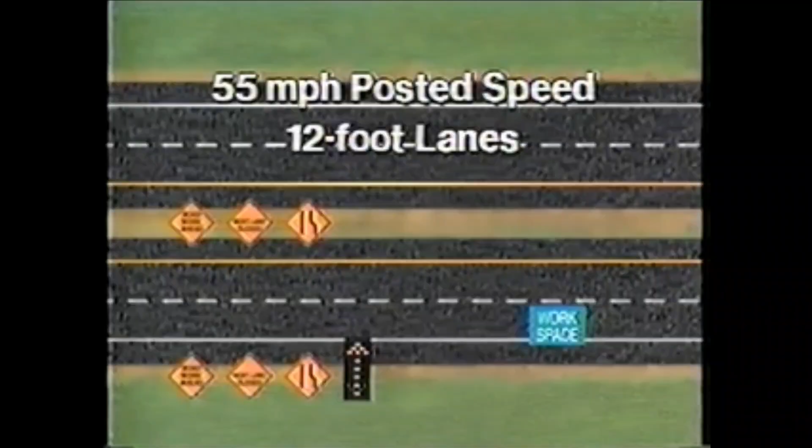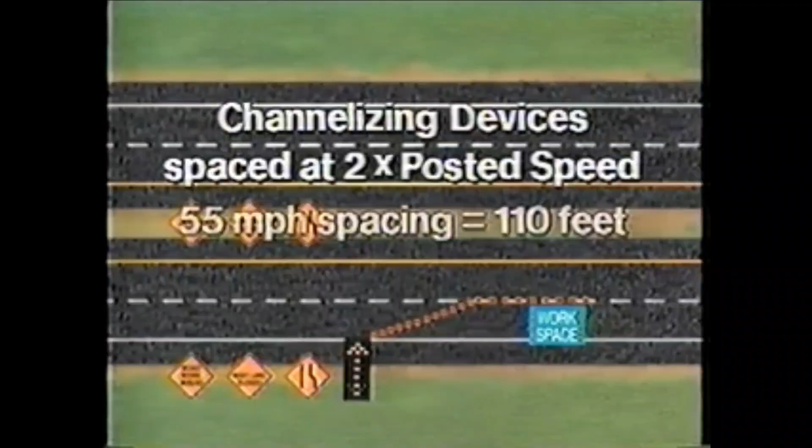With a 55 mile per hour posted speed and 12-foot lanes, the taper should be 55 times 12, or 660 feet long. For this example, the lane closure taper consists of 13 channelizing devices on 55-foot centers for a total of 660 feet. A 335-foot buffer space and the workspace are outlined by channelizing devices spaced 2 times the posted speed. For 55 miles per hour, the spacing would be 110 feet.

The next element installed is a downstream taper, 100 feet minimum. The last element, the End Roadwork sign, is then installed 500 feet from the workspace. Finally, the work vehicle can be moved into the workspace. Again, evaluate traffic controls by driving through the work zone after all the devices are in place. Remember to put yourself in the place of the unfamiliar driver, the one who is not anticipating your presence on the roadway.

Now the work activity may begin. After the project is completed and all workers, materials, and equipment are off the roadway, the traffic control devices are removed in reverse order of installation.

Finally, let's look at mobile operations. Generally, this work uses a moving vehicle train with occasional stops of less than 15 minutes. Mobile operations should be used only during daylight hours and at locations that offer good visibility. When the sight distance is restricted approaching a mobile operation on a 2-lane roadway, a flagger should be used to protect the workers and to warn the driver.

Traffic control for a mobile operation should include warning signs, flags, flashing vehicle lights, channelizing devices, and protection vehicles. Arrow displays should also be used, except on 2-lane roadways.

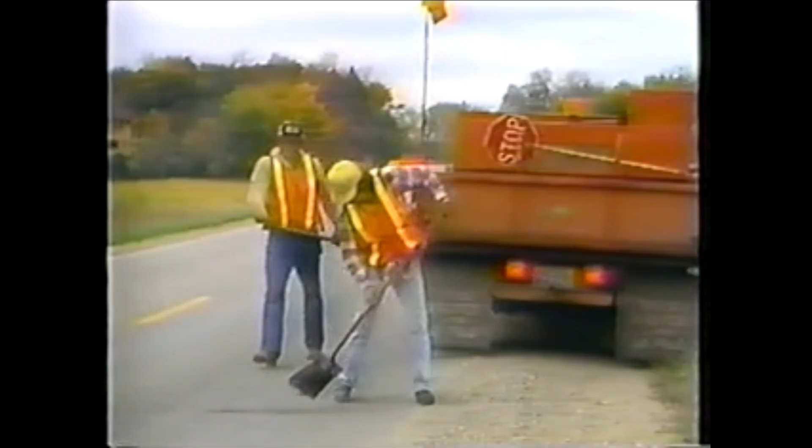Despite the brevity of short-term operations, certain traffic controls are necessary. In urban areas, the work vehicle may be used for warning if it's equipped with flashing lights, rotating beacons, or flags. When it's necessary to enter or leave a manhole, workers should always station a work vehicle upstream from the manhole. Materials or equipment should be stored away from the manhole opening. These principles presented apply to utility work zones and are just as mandatory as those in roadway work.

We have briefly reviewed a few examples of layouts under a number of different conditions. Now, this small number cannot nearly begin to address all the possible situations that you'll encounter. You'll often be called upon to develop your own traffic control plan, providing safety for both workers and drivers. But while this task may be time-consuming, it is part of your responsibility that can never be set aside because of the urgency to get on with the job.

Your safety, the safety of your fellow workers, and the safety of the driving public will depend on you performing your flagging duties properly. An effective flagging operation is not something that just happens. It's the result of planning, proper training, and the use of good flagging procedures. This program was developed to help prepare you to be a flagger.

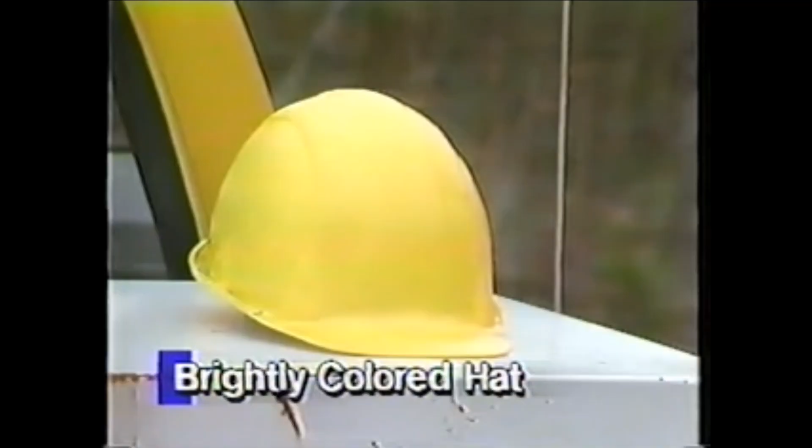Your clothes shall include an orange safety vest, shirt, or coat, and may include a brightly colored hat. This clothing makes you more visible to traffic and makes you stand out from the other workers. It is also a good idea to carry an air horn to alert your co-workers if a vehicle appears likely to run into the work area.

The main traffic control device used by flaggers is the stop-slow paddle. This sign is octagon-shaped, at least 18 by 18 inches, with 6-inch-high letters. The paddle should be mounted on a handle that measures at least 5 feet from the ground to the bottom of the sign. A 6 or 7 foot mounting height will make the paddle more visible.

Before beginning any flagging operation, advanced warning signs must be in place. For most flagging operations, this will include a roadwork ahead sign, a one-lane road ahead sign, and a flagger symbol sign. In some cases, other advanced warning signs may be used, but in all cases, the flagger sign must be in place before flagging begins. With advanced warning signs in place and with proper equipment, the flaggers may now begin controlling traffic.

Because drivers are sometimes tired, preoccupied, or impaired, you must remain alert at all times and stay on your feet facing oncoming traffic. Always stand alone in a highly visible location away from other workers and work vehicles. However, never stand directly in the path of an approaching vehicle. Generally, flagging operations require 3 basic skills: stopping, releasing, and slowing traffic.

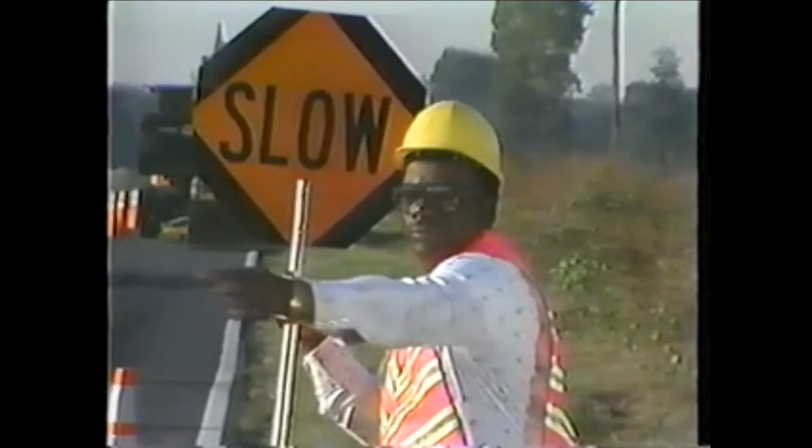To release traffic from the closed lane, turn the slow side of the paddle to face the vehicles. With your free arm, signal the drivers to proceed into the open lane. Be direct and point in the direction you want the traffic to go. Never wave the paddle. After all the vehicles have passed, turn your paddle to stop and wait for the next vehicle.

The second way to release traffic is from the open lane. After the road is clear ahead, display the slow paddle to the drivers. With your free arm, motion the drivers to proceed. Again, be direct and deliberate in your motions.

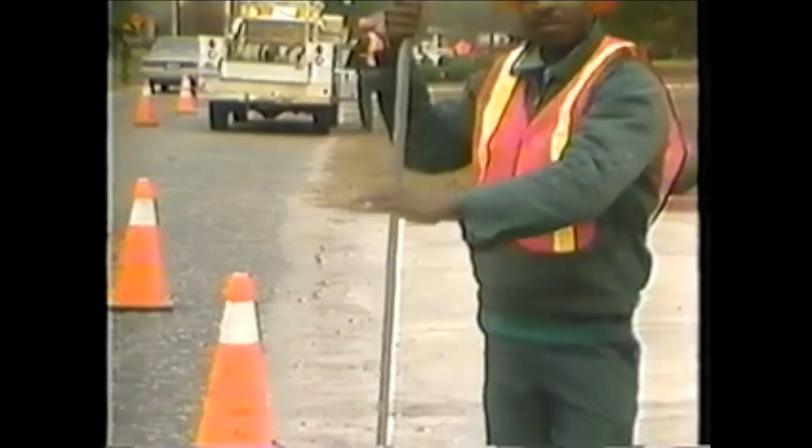In some cases, you may not need to stop traffic, but only slow it down. In these cases, always stand on the shoulder of the road. Display the slow paddle to oncoming traffic. Use your free arm to motion traffic to slow down. Remember, never stand in the path of oncoming traffic.

If you learn these 3 basic skills, you'll be well prepared for any flagging operation. Situations will vary, and how you apply these skills will differ from project to project. Remember, never start any flagging operation until advance warning signs are in place. These signs tell the driver that you're controlling traffic ahead. Without these advance warning signs, the driver does not expect you to be in the roadway. Now, let's look at some typical situations a flagger may face.

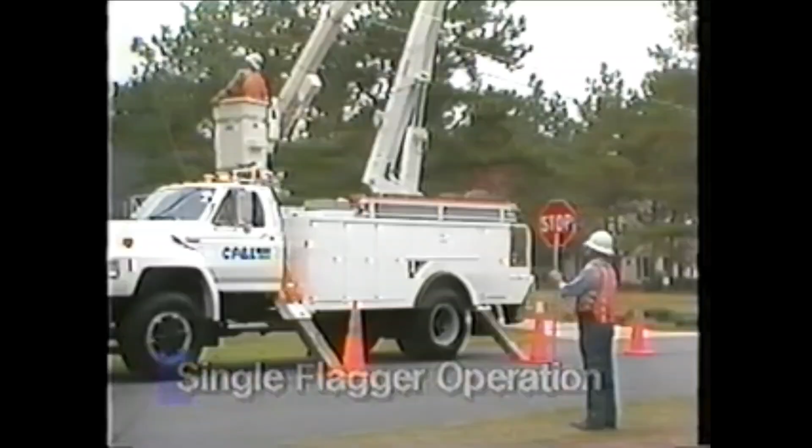The first situation is a single flagger operation. Sometimes only one flagger is needed to control traffic on a low-volume two-lane road. Where only one flagger is used, the work area must be short and on a straight section of roadway. The flagger must be visible to approaching traffic from both directions.

In a single flagger operation, the flagger stands on the shoulder directly across from the work area, so that he or she is visible to traffic approaching from either direction. Then the flagger can assign right-of-way with the paddle. Remember, a single flagger operation is only acceptable for low-volume conditions where there is good sight distance from both approaches and the work area is short.

The second situation, probably the most common, is the two-flagger operation. When two flaggers are used, they must always be able to communicate with one another. This can be done by keeping visual contact, using radios, or using the flag-carrying method. In these cases, one flagger is always in charge of the operation. If visual contact is possible in the work zone, then the operation normally works like this.

One flagger displays the stop paddle and stops traffic, while the second flagger displays the slow paddle and releases traffic. The first flagger continues to display the stop paddle and stop all traffic until the second flagger turns his paddle to stop and gives an all-clear signal. This signal tells the first flagger he may release his traffic by displaying the slow paddle.

If radios are not available, then the flag-carrying method is another way to maintain communication between the flaggers. The first flagger hands a flag to the last car allowed to go through. When that driver reaches the second flagger, he hands him the flag. Having received the all-clear, the second flagger can now allow traffic to flow safely in the opposite direction.

This operation is very simple, but the flagger must be assured that the driver of the last vehicle will pass the flag to the other flagger. Remember, communication between flaggers is vital, and radios are the best way to maintain communication.

The third situation is use of a pilot car for traffic control. This method works best where the route is particularly long or dangerous, or where the work area changes so often that proper signing is difficult. The pilot car is used to guide a train of vehicles through the job or detour. This operation uses a flagger at each end of the one-lane section. In this type of operation, the flaggers hold all traffic on each end of the work zone until the pilot car arrives and leads the traffic through the work zone.

A safe turnaround location should be provided for the pilot car at each end of the work zone. Provision should also be made for identification of the last vehicle in the column. The vehicle selected for the pilot car should be lightweight and easy to handle. It should have the name of the agency or contractor clearly displayed. The pilot car sign shall be mounted on the rear of the vehicle. 2 or more pilot cars may be used to guide traffic through a particularly complex or dangerous detour.

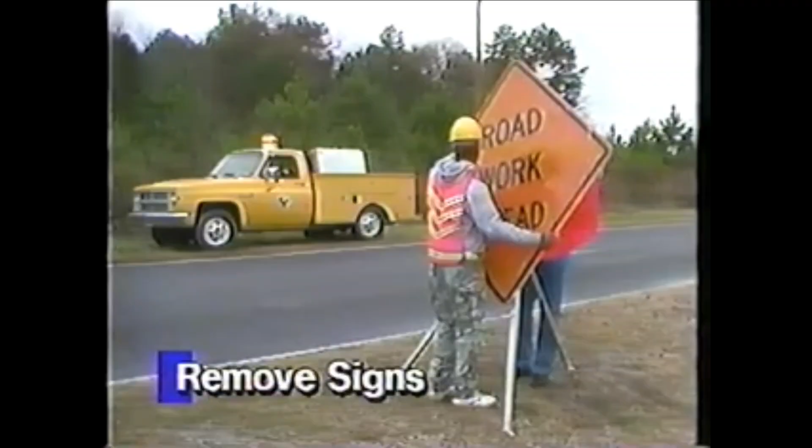Schedule routine breaks for your flaggers. Drive through the work zone and observe the flagger's operation. Close calls or skidding mean that the flagger stations need to be moved or that other problems exist. Signs should not be left up after flagging is completed. Remove, fold over, or turn away the flagger and other inappropriate signs when flagging is no longer being performed. Do not mislead the public.

For additional information, you may refer to the Flagging Handbook produced by the American Traffic Safety Services Association. This is a pocket-sized handbook which you may want to obtain for your flaggers. Flagging is one of the most important jobs in any construction, maintenance, or utility operation. It is also one of the most dangerous. However, with proper training, equipment, and procedures, flagging can be safe and effective.